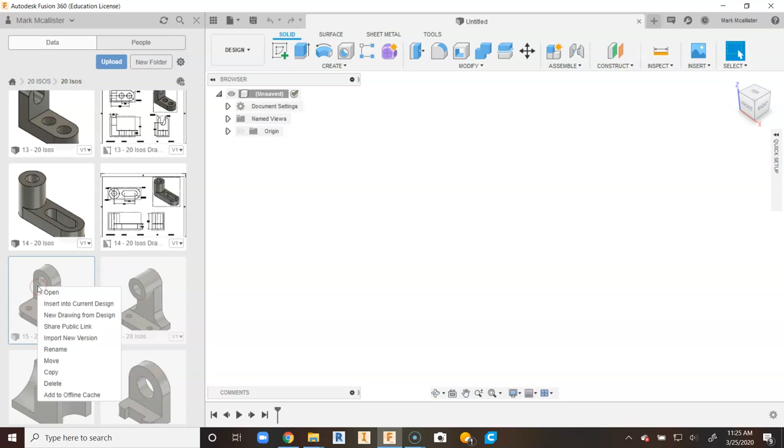This is a video for how to go about creating a dimensioned drawing of number 15 from your 20 ISOs project in Fusion 360. One thing I want to show you real quick is you can right click on one of these parts and go to new drawing from design, but you're going to notice that it doesn't automatically open that template that we are using for the classes that I teach. It's going to go to a default template.

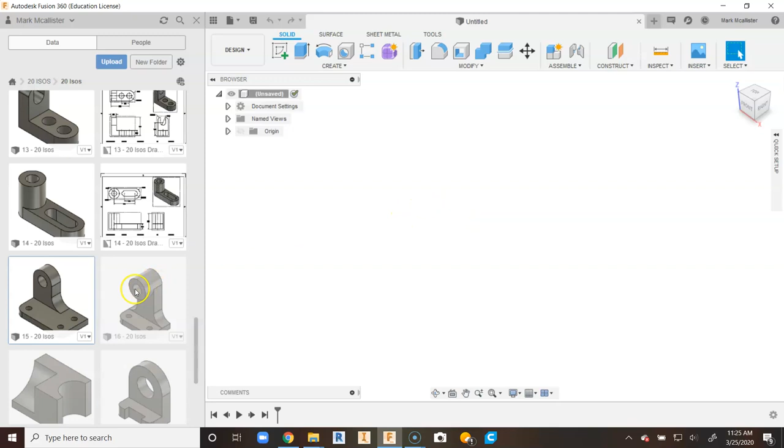Now we don't want that default template, so if by chance you knew that you could right click and go to a new drawing, you want to make sure that you're using the template that's within your project folder. So if we double click on number 15, we go to design, we go to drawing, and from design it's going to automatically show that title block that I have saved within this project folder. So that is one of the benefits of having that title block saved within the project that you're working on.

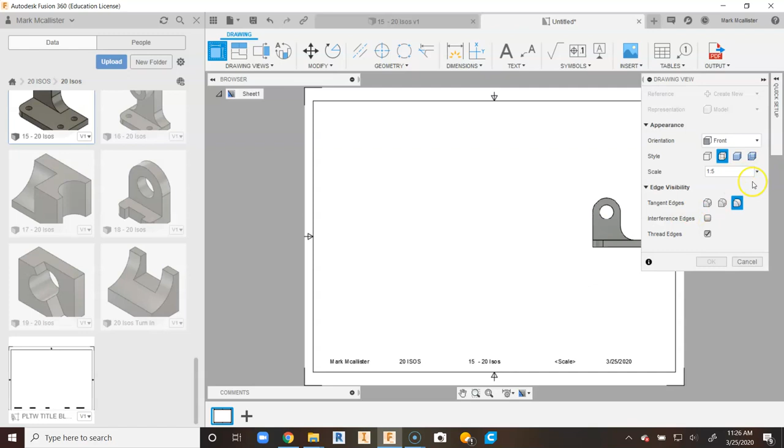So once our drawing sheet loads, we're going to go to a 1:3 scale, and we're going to go ahead and just place our front view, and we're going to say OK, and we're going to go to projected, and we're going to project our top, our side, and our ISO. We're going to right click and say OK. Right click and say OK. We're going to double click on our part, and we're going to go to shaded. Shade the view, say close.

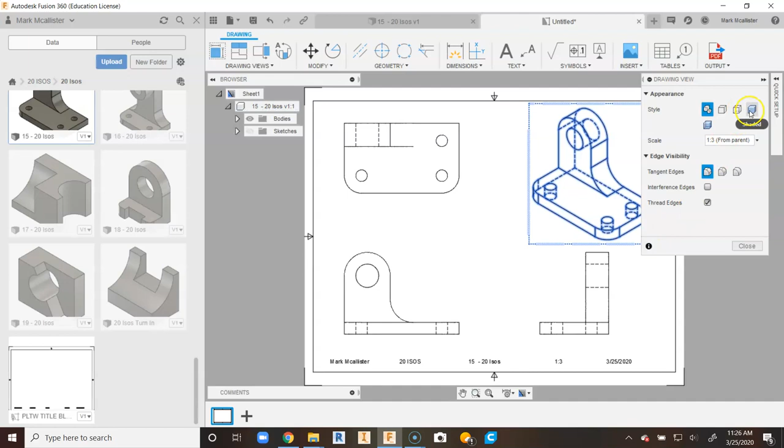Now we're going to go up and go ahead and just start saying save. Save as early as you can. In previous videos I haven't been saving as early as we probably should. Sometimes you just get working and forget to save, but let's go ahead and say save, and we're going to go up and place our center marks.

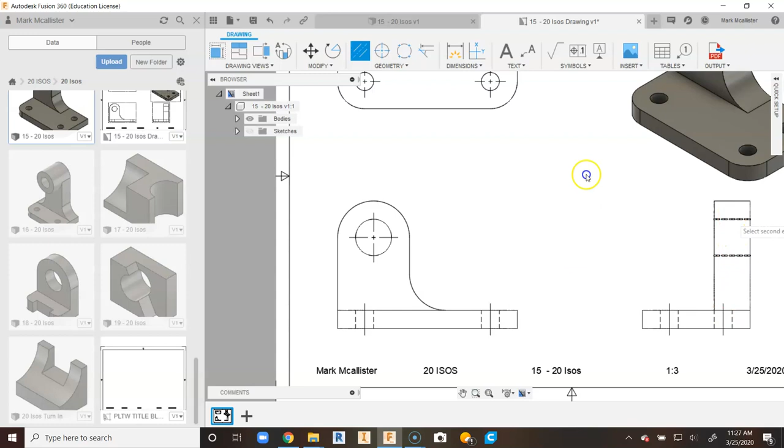So we have for ourselves 3 small holes here, and we have ourselves 1 large hole and 1 large arc here. You won't see much of a difference with the arc because it'll just give you that small little plus shape, but we do have 3 small holes and 1 large hole here. We're going to go up to center line bisector, and we're going to give ourselves a center line between that hole, and we have these 2 center lines to bisect in our front view, and we have 3 holes to do center line bisectors for in our side view. So lots of graphic communication going on as we get further and further into parts that have more features in them.

So as we start looking at our part, one thing we'll do first is I always like to do the holes first, and then your height, width, and depth dimensions second. So one thing we'll notice is as we go into dimensions, each one of these holes on the outside have a diameter of 1. So we're going to go ahead and just place one of these here. Let's just choose this angle here, kind of drag out a diagonal angle.

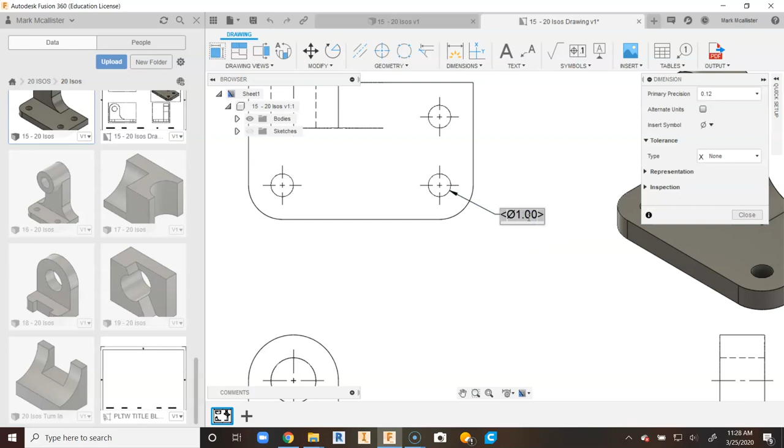Remember that when you place a leader line, these arrows with the lines that are pointing to the holes, those are known as leader lines. They lead you to the features. So I'm not going to go straight down, and I'm not going to go straight over. I'm just going to drag out at a diagonal line, and I'm going to click. We're going to right click and say OK, and there's 3 holes with a diameter of 1. We'll double click, spacebar times 3, and hit enter.

We're going to have for ourselves really 3 arcs, I believe, that have the same radius. So there's a radius of 1.50, there's a radius of 1.50, and this one has a radius of 2, excuse me. So this one right here, we're just going to click, and let's just drag out at an angle. Right click and say OK. Let's go ahead and double click. It was talking to me. Times 2. I think I accidentally highlighted the whole thing. We're going to hit enter.

We have an arc down here. We're going to go up to our dimensions, and we're going to click and drag out, and that will be a radius of 2 placed there. So we have all of our radial dimensions basically done as far as the arcs go. Now this is a half circle up here at the top. We will need to come in and place a radius dimension for this.

So I'm going to go ahead and click with a radius of 2, and again we'll have ourselves a diameter dimension for a hole, and we're going to click and drag out again with a diagonal line. All leader lines are diagonal, and we're going to place that with a diameter of 2. So when we look up here at the top, we're going to be able to tell what the width of the object is by multiplying the 1.5 by 2, because we have this arc radius here, and that radius lines up perfectly at this kind of 90-degree angle.

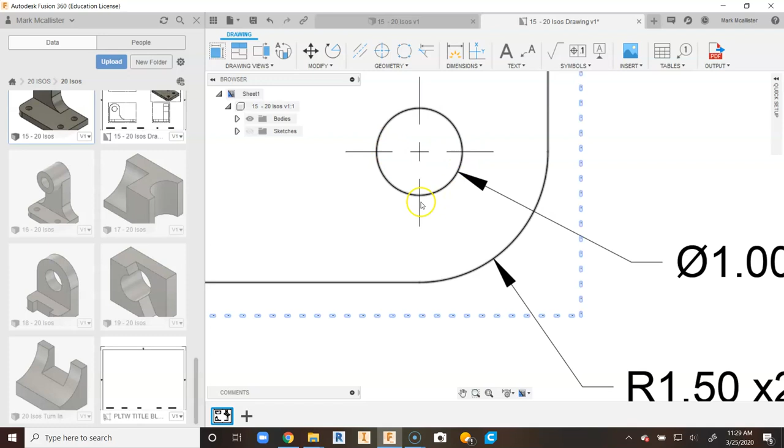I would say, when you zoom in on this, think of north, south, east, and west. Well, this line right here is a perfect straight vertical line that would go right into the side. So we're going to try to find the full width of the object. We're going to be able to say in dimension that from our center point of this object here, if I zoom in, I clicked on a line accidentally.

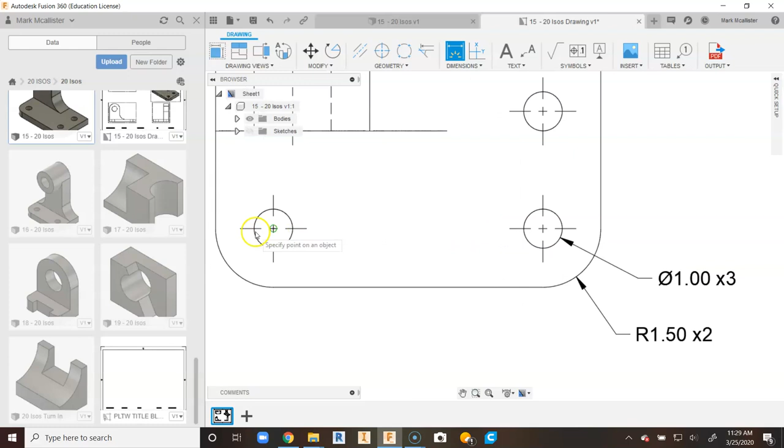If I go to dimension, I just want to click on that center point, that center hole right there. When you see the circle show up, click, and I'm going to drag straight down, and the distance between both those holes is 7. So I can take 1.5 times 2 is 3, plus 7 is 10. That's the full width of the object. There's no need to give a full width dimension.

So that's one of the benefits of going in and actually dimensioning your radius and diameter dimensions first, is you can give yourself a little bit of a head start before you start dimensioning any width dimensions, because you know exactly what you're going to have to do as far as width goes. That's the only width dimension that we'll place that isn't a radius dimension. So our depth dimensions we'll look at next.

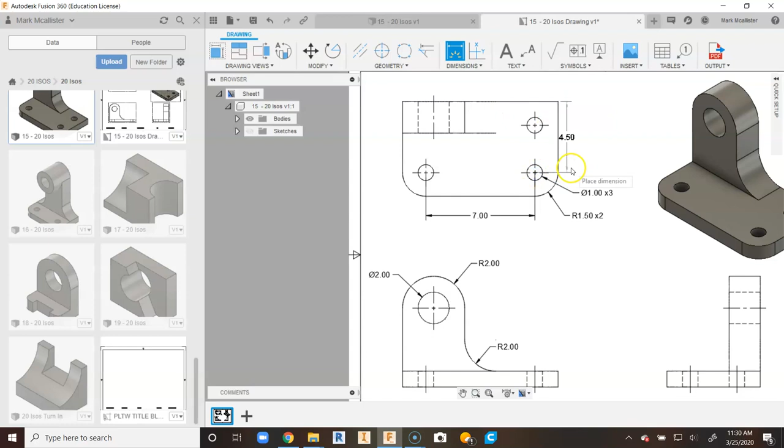So the full depth of the object, we have 1.5 right here, which comes over to this point, and we need to find a location dimension between these two as well. So from a dimension standpoint, we're just going to say from here to here is 4.5, and then from here to here is 1.5. And we're keeping everything adjacent because remember, depth dimensions are between these two views. So I can basically just take 1.5 plus 1.5 is 3 plus 4.5 is 7.5. That is the full depth.

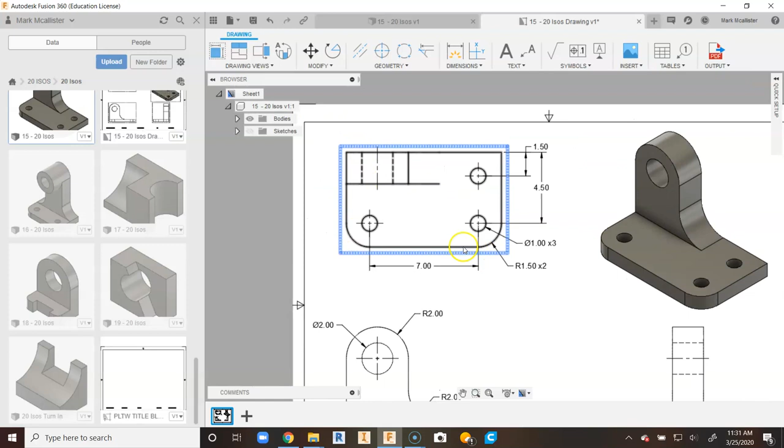I really don't want to come in and just start placing a dimension that goes from here to here, because you're really just being redundant, because you're kind of saying that you can't tell how to add up dimensions, and plus I'd be dragging more extension lines all over the place. I just want to keep this the way that it is. So we know our location dimensions for each one of these holes, because we know that from the side in to the center point, each one of these holes is just 1.5. So if this theoretically was a rectangle, we could just measure in 1.5, measure in 1.5 from the side, and we'd have those center points.

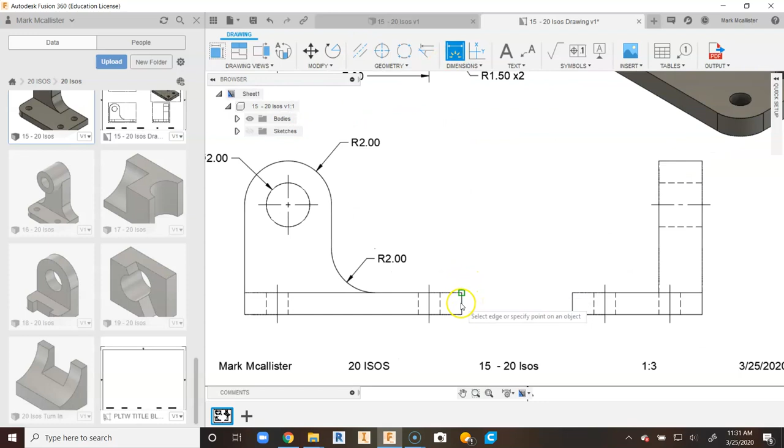All we have left to do now is height dimensions. If I drag this in just a little bit, sometimes I like to bring the view in a little bit if I know I just have a few dimensions to do. And in this particular case, all we really have is just the height of this ledge, of this little line right here. If the line shows up, sometimes you're just better off clicking the points, and I'm just going to drag out, and that's 1. And for the sake of this video, I'm going to say from our center line down to the bottom is going to be 5, and I'm going to drag that out. It snapped automatically. Sometimes you have to click and drag these out a little bit so they don't snap.

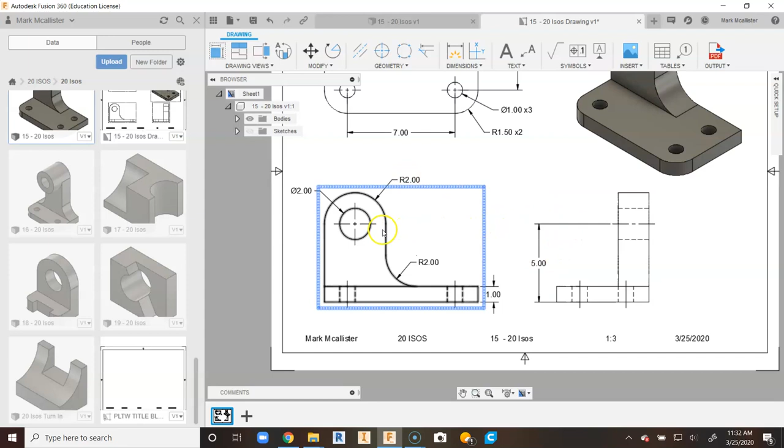So you might be thinking, well, then what's the full height of the object? It's 5 plus 2. Our extension line right here would go directly into this horizontal line of our center mark, and we can add 2 to it since that's a radius dimension. So from here up to here would be 2. 5 plus 2 is 7. We know that this ledge right here is 1.

One other thing we can do that I didn't do at the beginning is click on center mark up here, and click on this arc, and it'll give us a little center point out here for where that arc begins. I forgot to place that at the beginning, but looking back through and doing a quick audit, I always like to audit dimensions before I actually get done with them and turn them in. But this would be really all you need to place for all dimensions to be accounted for with this object.

You notice that there's not a ton of lines and a ton of arrows all over the place. We saved ourselves a ton of ink by putting ×3 and ×2. Otherwise we'd be kind of insulting the designer's intelligence a little bit, or let's say the manufacturer's intelligence, like if we tried to say that the full width was 10. We don't need a full width of 10 dimension, because we know that they can read the drawing and do simple addition to find those full dimensions.

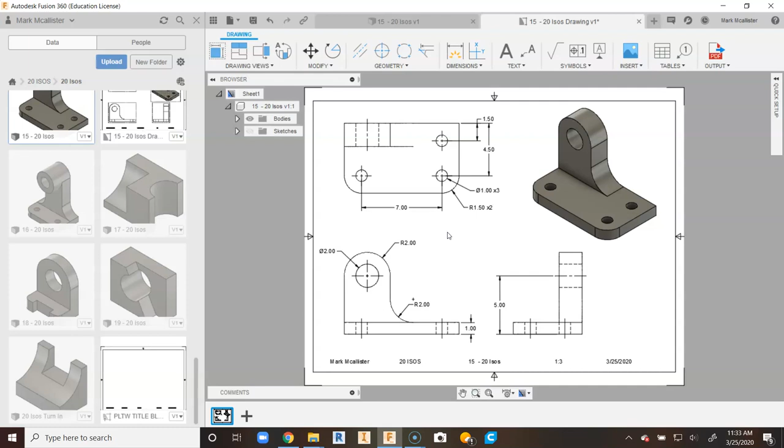So this has been a video on how to go about creating a fully functioning working drawing from number 15 in your 20 ISOs project in Fusion 360.